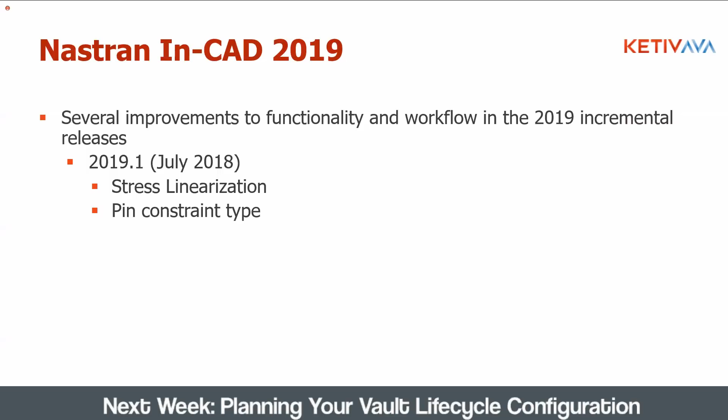So first of all, I want to talk about what was modified, what was changed in 2019. There were several improvements to the functionality and the workflow in the 2019 incremental releases as compared to the 2019 release. So if you didn't download some of the updates, for example the 2019.1 in July, you may not see some of the new features like stress linearization, for example, which you will now see in your results environment. There's also a new pin constraint type that was introduced in this release.

And there was also something called signed stresses for fatigue. So in a multi-axial fatigue study, you now have an option to either look at the stresses just as absolute values, or you can actually have the positive or negative sign attached to it - positive meaning tension and negative meaning compression. So it allows you to differentiate between the two types of stresses.

One of these, stress linearization, we actually covered in depth in September of 2018. We did an AVA on that specific topic. If you're not familiar with the concept of stress linearization, it's something that's pretty useful in designing pressure vessels, and it helps you specifically compare your FEA results with the pressure vessel code.

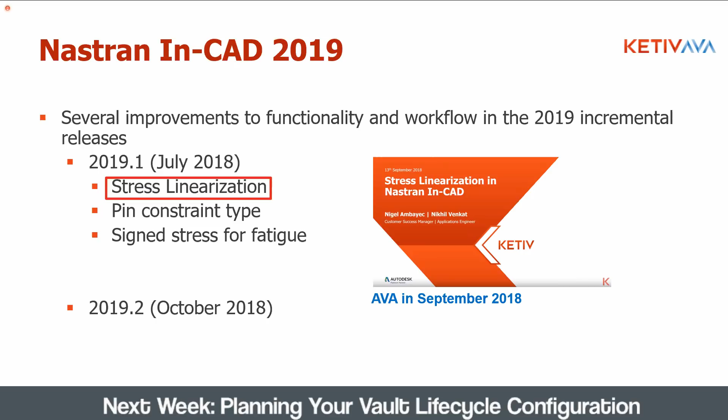There was another incremental release in October of 2018, and this was slightly less significant. So there were a couple of little additions in here. There was a new constraint type called the frictionless constraint type, and then there was a new contact type as well, which made it easier to model shrink fits and interference fits.

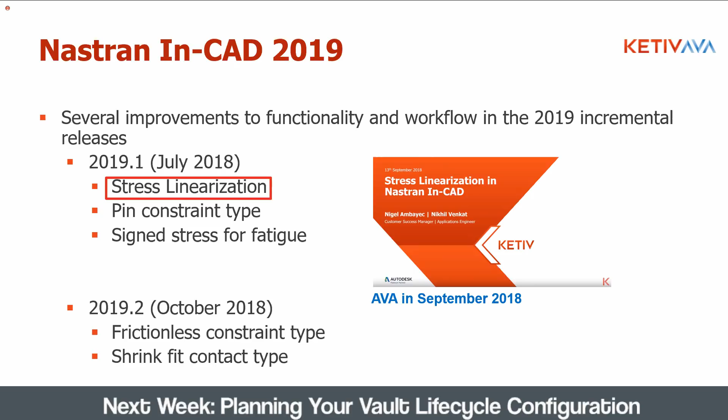Between 2019.2 and 2020, there have been several new features and improvements. Most notably, as Nigel already mentioned, this is now called Inventor Nastran, so you don't have to worry about the confusion between Nastran versus Nastran InCAD and all of that. Inventor Nastran, I think, captures more of what Nastran InCAD is about.

In addition to the usual improvements in meshing, improvements in solver, and improvements in general aesthetics, there's now improvements in how Inventor Nastran handles frame generator components. If you've tried using frame generator in Nastran InCAD 2019 and previous, you would have noticed a few bugs. For example, when you try and select a specific member of a frame, the solid portion of that would disappear and you would just see the line there. So they've fixed some of those bugs.

They've also fixed the bugs with the unit system. You may have noticed that there were different units being used in different areas. You may have set a unit system at the beginning of the analysis, but you still go into your loads and it still says Newton, or it still says kilograms, when you were really going for pound force or PSI. Those have been fixed as well.

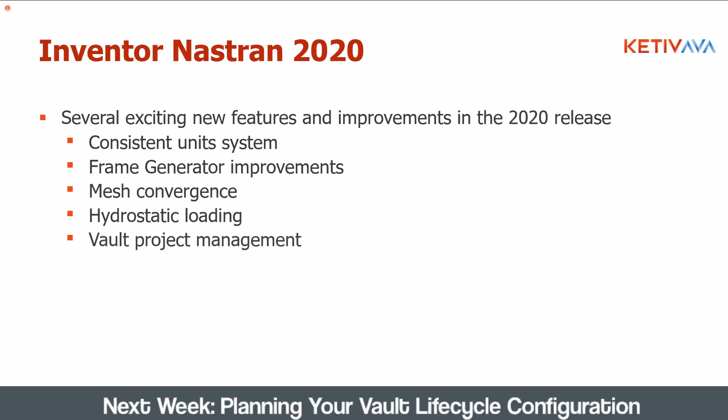But the biggest improvements, the biggest enhancements come with the addition of new features: automatic mesh convergence, hydrostatic loading, and the biggest and a really important one, I think, is Vault project management. Those are the ones that we will be covering today: mesh convergence, hydrostatic loading, and Vault project management.

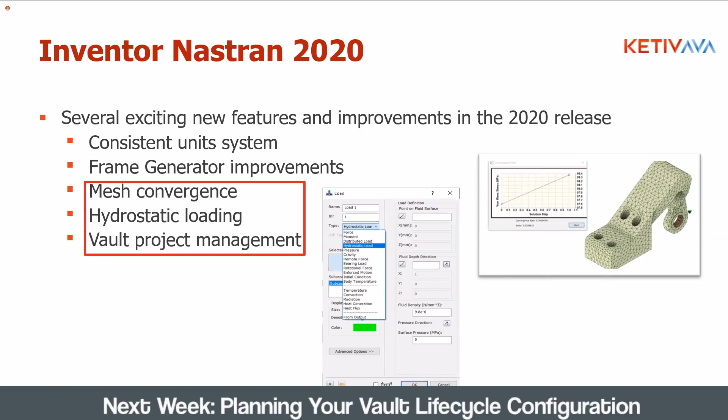The Vault project management, again, if you've been using this for some time, that's been a source of frustration for a lot of users, because at the end of the day, Nastran does generate a whole set of files associated with a certain analysis, and managing that manually can become really difficult, particularly considering the way the files were saved with names that were pretty much gibberish. So that's now a lot easier to manage, and you can now manage it using one single package file. We'll talk about all that in detail.

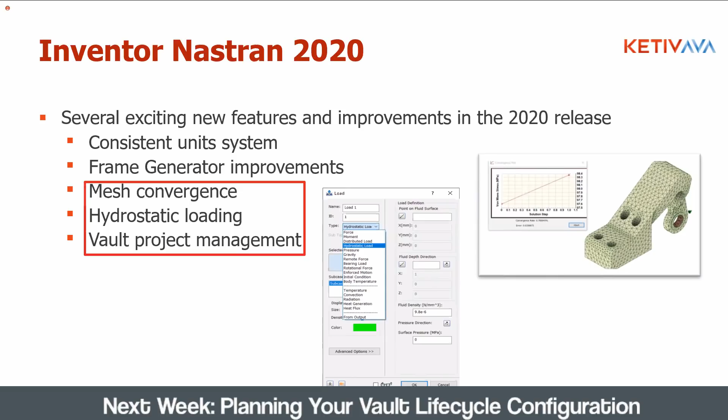Let's start with the first one on there, the mesh convergence. First of all, this is Inventor 2020, and if you haven't had a chance to take a look at it yet, you'll notice that it looks different. Aesthetically, it's different, it looks a little cleaner. The Nastran environment also changes because of the Inventor environment. Right in your environment now, it doesn't say Nastran InCAD anymore, it says Inventor Nastran.

Right here I have a pretty simple bracket. You can see it's got a few different components here. It's got two planks, it has a bushing, and it has this needle, which is going to be your load bearing component.

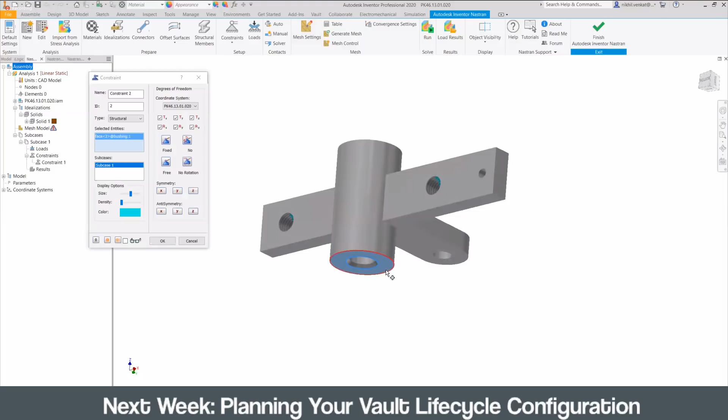To start with, I'm going to add some pretty simple constraints here. I'll fix the bolt holes on either side of this, on either plank, and I'll fully fix those. I'm also going to go ahead and fix the translation of the base, the bottom surface of this bushing. So this is going to be allowed to rotate, but it won't be allowed to translate. Next, I want to apply a load.

In this case, I'm going to apply a moment. So under loads, if you change the type of load to moment, then I'm going to select... actually, hang on, this is one of those things where I didn't change the unit system. I'm going to go back and modify it. So this is Newton millimeter, and I want that to be in pound force inches. I'll go back and edit my unit system to English.

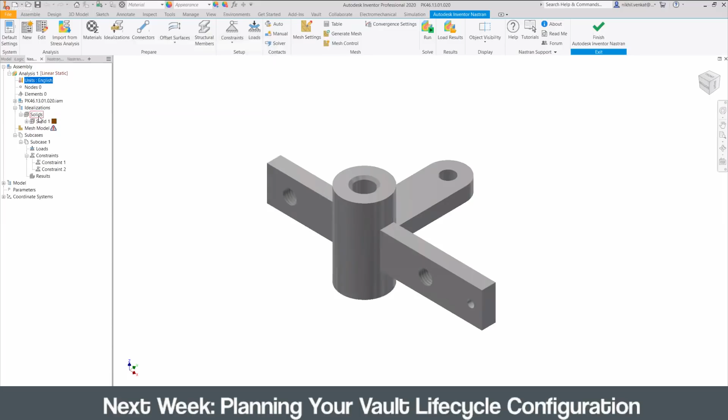If I go back and add a load, notice that automatically changes to pound force. Previously, this didn't, and this is one of the bugs that's been fixed.

I will apply this moment to the needle end here, the hole at the end of the needle, and that's going to be a moment of minus 200 about the z-axis. Go ahead, hit OK, and you see a little glyph there. It's associated, it's inside the surface, but that's essentially the direction of the load that's going to be acting on that surface.

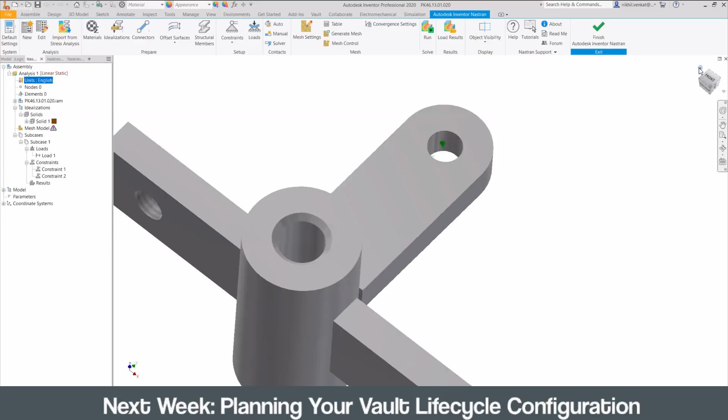I'm also going to go ahead and modify the mesh size here. So I'll use a mesh size of 0.16 inches. And I'll modify some of these parameters, at least the element growth rate, since there are a number of holes in this model. I want the growth rate of the elements to be reasonably small.

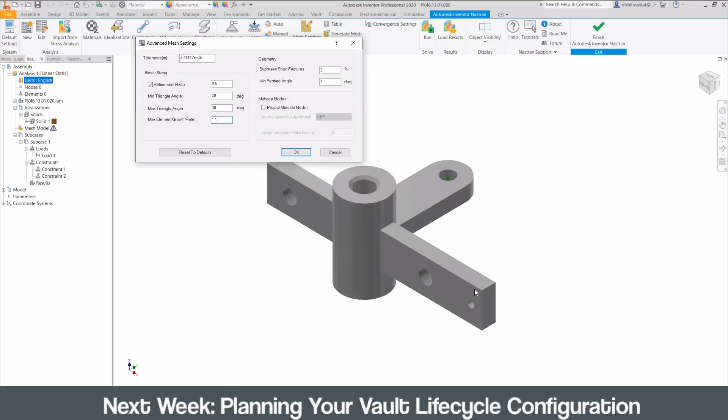Okay, so we'll go ahead and generate that mesh. And when I say element growth rate to be small, notice how the elements around the smaller hole there are actually smaller than the elements around the larger hole in the rest of the body. So that's what we mean by small growth rate. If the growth rate were larger, then you would see a more uniform distribution of elements between the two holes here.

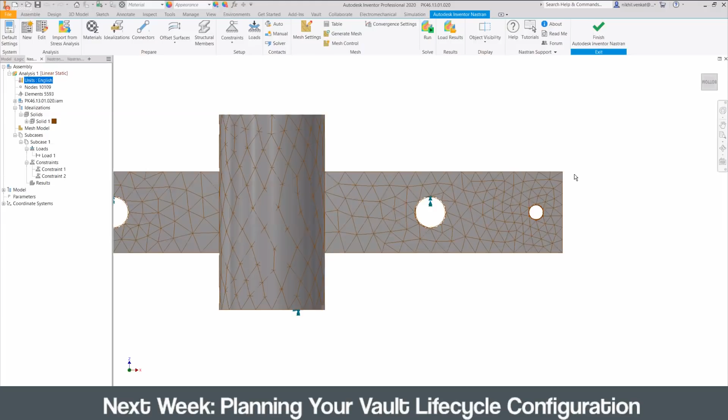Now the new feature is the mesh convergence portion of it. To back up, we've talked about mesh convergence in one of the previous AVAs from last year, I believe. The mesh convergence setting in general is a metric to determine how accurate your solution is with respect to your mesh. In general, the finer the mesh, the better, the more accurate the solution. But there comes a point when refining the mesh further doesn't change the solution significantly. At that point, your result is a mesh independent solution. And that's what we're going for, right?

Previously, we would have to manually go in, run the analysis, get some result. Now, to confirm that your solution is independent of your mesh, you would then have to go back, modify the mesh again, rerun the analysis, and keep checking that way. This was not an easy process. It was not a quick process. That's now a lot easier.

So I can go into this convergence settings and refine the mesh either locally or globally. In this case, I'll choose local refinement. I'm going to choose the number of refinements here, let that be 5. And I'll talk about what these different parameters mean. The refinement factor is how much you want to increment the element size by, right? How much smaller do you want to make the element? In this case, I'll say I'm going to refine this by a factor of 10%.

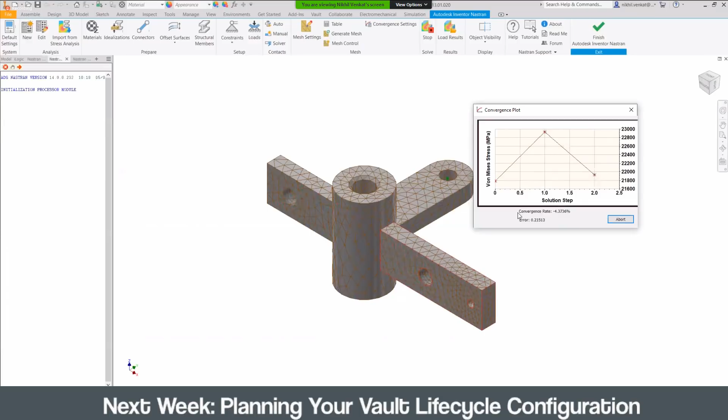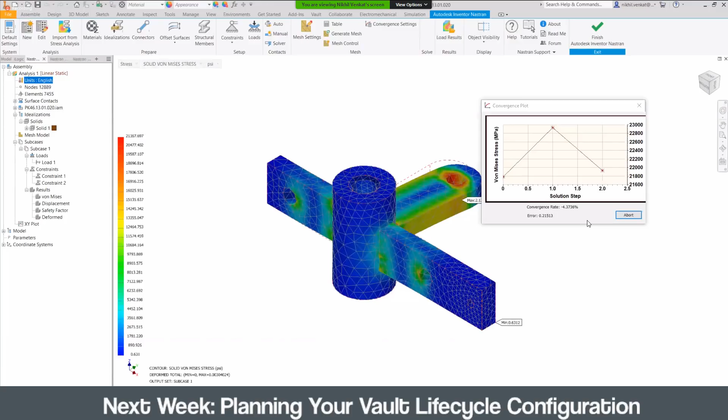It's a lot easier now to understand the accuracy of your solution, and this will tell you whether or not your mesh is the source of your inaccuracy. This convergence plot will go on until all the iterations are done. Okay, we'll give this a second. Okay, there we go. It says stop criteria has been met, or the number of refinements have been attained.

That finishes the refinement process. We're seeing that at solution step 1, after you refine it the first time, the stress actually increases at whatever the highest stress point was. But subsequently it keeps going down, and eventually the convergence rate goes below 3%. It's negative in this case because the stress is reducing, but the absolute value is still below 3%. This gives us an idea of how good our solution is with respect to the mesh, or rather how good our mesh is for this particular problem.

Now you can also do this globally. If you're not sure about the global mesh size, what we did here was local refinement. If you're not sure about the global mesh size itself, you can change this to global refinement and run the same problem.

Any questions here? I want to reiterate, go ahead and open those convergence settings real quick, Nikhil.

I know that 19-year-old me, 20-year-old me, engineering student me, would have made these numbers absolutely ridiculous—like number of refinements 50, stop criteria 0.5%. There is a point of diminishing returns, much like increasing mesh element number. You're going to get to a point where it's almost flat, and all you're doing is crushing your computer without actually getting a better answer, or an answer better by maybe 0.1%. So please use reasonable numbers in here. I know that me 10 years ago would have done some ridiculous stuff in here.

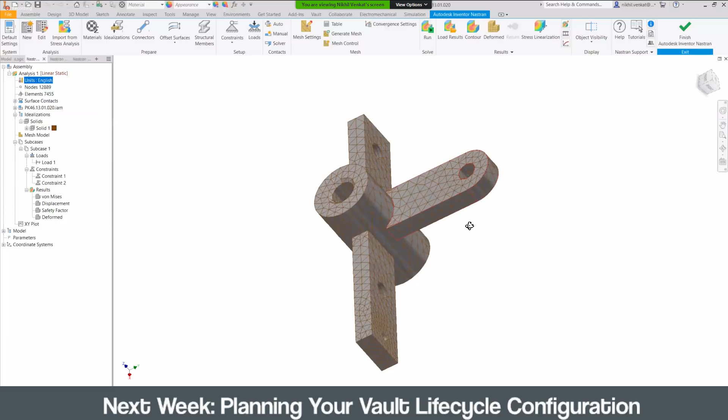So most of the refinement is going to happen either in this region where the constraints are, or in the areas of contact, because we do have some sharp corners and everything. So it's going to be in one of those two regions. That's the difference between local and global—it's got nothing to do with the total size of the element itself, but local refinement is going to deal with those areas of highest stress. And it's important to remember that it's highest stress, not highest displacement.

Cool, hopefully that answers that. Nikhil, can you go into the results of this and show where it actually shows the convergence stuff? Sure.

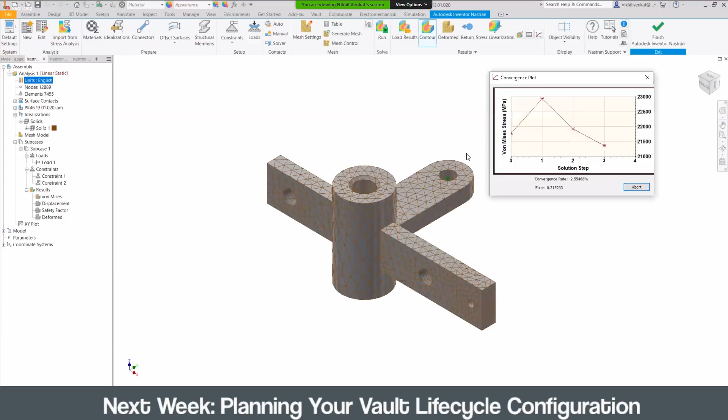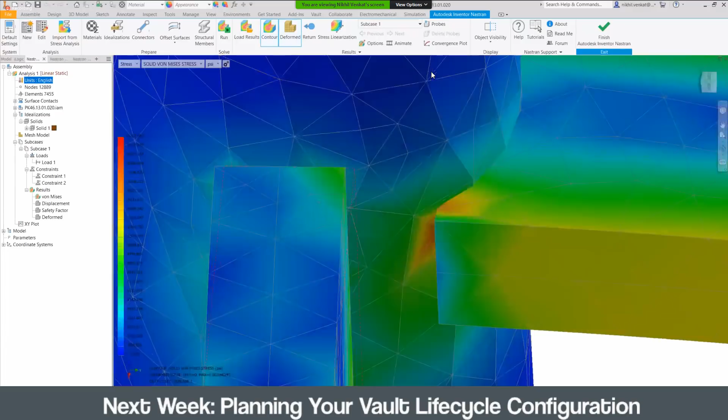So the convergence plot, if you go into the results here, you'll see that right here. And it's either refining these areas or it's refining those areas there.

That's where you would access the convergence plot. If you had a percentage where the absolute value was less, it would take longer for the mesh to converge. And if you had a larger number of iterations, it'll just keep going. So like I said before, don't make that number too big, at least on the first try, because we kind of have an idea that the mesh needs to be refined in these areas. Maybe after this trial, we can manually refine the mesh in those areas, or run it again with some more critical numbers in there.

Obviously not changing it too much. So I think we can keep moving.

Okay, now we have this, we have our results, we have our converged results. This is going to show up as a file, hang on, let me find this file here. It'll be whatever today's date is. Modified, yeah, it's going to be in here, I believe. Yeah, so there we go.

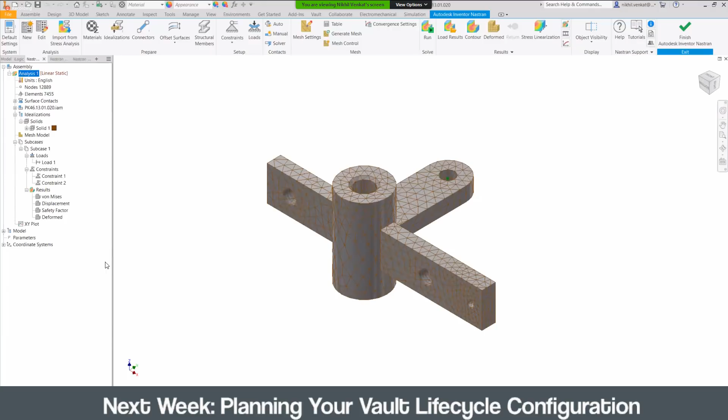It'll be one PKG file per assembly, but that one PKG file can contain as many things as you want. If you had 4 or 5 different analysis types here—linear static, normal modes, nonlinear, etc.—you can still create PKG files and associate them with the CAD model. The only thing this package file does is zip everything together. It just grabs everything that's in the FEA file, in the InCAD file, and in the InCAD folder, and zips it all together.

No matter what gets added on to this results folder, that can then be updated and added to the package file. Hopefully that answered that question.

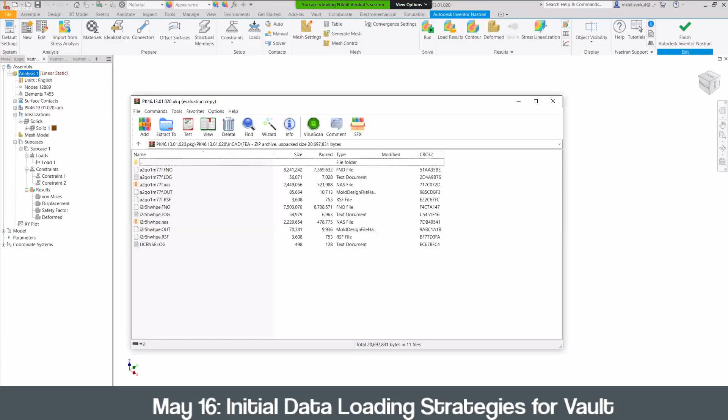To check this file in, you need to use the Vault client. You don't check it in from Inventor. Yes, you need to go into the Vault client and actually check it in, whether that's an initial check-in or a recheck-in. It'll look on your local working folder to find out where that is and do it. Let me show you how checking this file in looks like, if I can log in.

It's much more secure than mine—mine has no passwords. I believe I was showing somebody that they needed to use their password, and that's why I just created one. You're probably not using a Vault project file. Yeah, I'm not, okay, never mind, we can go do that later. Yeah, we can open this up later on. Let me just save this in the meantime. Okay, alright.

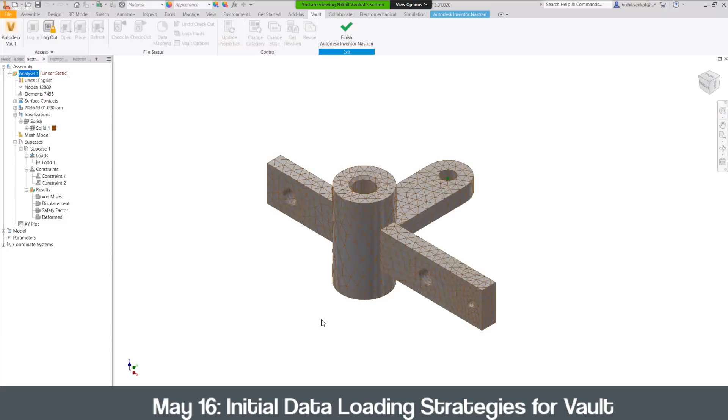So if you recall when I was talking about the new features, the third thing I talked about was hydrostatic loading. That's a pretty interesting feature as well. Hydrostatic loading, or a hydrostatic load, just means it's the load being applied by water because of gravity. It's as simple as that, right? Of course, there's the pressure being applied.

There's a big aspect to this, which is the height of the water. The water is going to contain potential energy because of its height, and due to that, the pressure is actually going to vary. Previously, you could still do this—some of you, if you've attended the Nastran In-CAD trainings, may have been familiar with a water tank example where you have a varying pressure with height. That's okay to do, there's nothing wrong with doing it that way, but it's a much more manual process and it's a lot easier to go wrong that way. Now you have a specific load type just for a hydrostatic load.

So I'll set this problem up with a very simple method. Let me just modify this material—I'll pick a steel tank. For constraints, I will fix the base, so nothing complicated here until we get to the loading part of it.

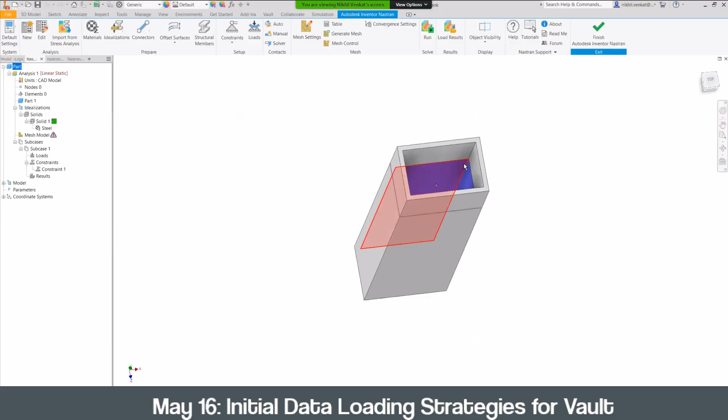Also, just by the way I've set this up, I have split this body into two, and everything in blue is supposed to represent the level of water. So on that surface, on the plane where the water ends, I have a point here, and that point is going to be representative of the surface of the water.

So assign a load, and this is the new load I was talking about. Previously, what you would have needed to do was apply a variable pressure load, using either a whole bunch of points, or an equation or something like that. Certainly not the easiest way to go about it.

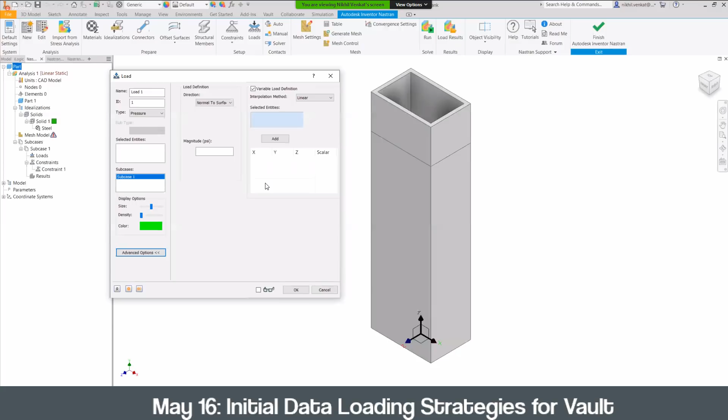Now you have this hydrostatic load, which contains information like your fluid density and your load definition and all that stuff.

So I'll select the entities to apply the load to, and that's going to be the blue surfaces here. So grab those. That should be 1, 2, 3, 4, 5 faces. There we go.

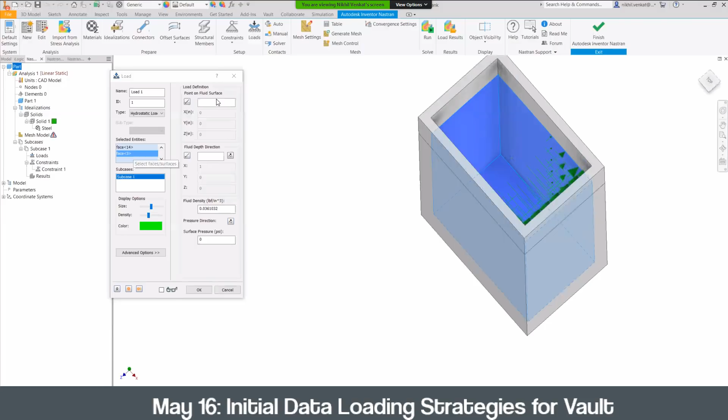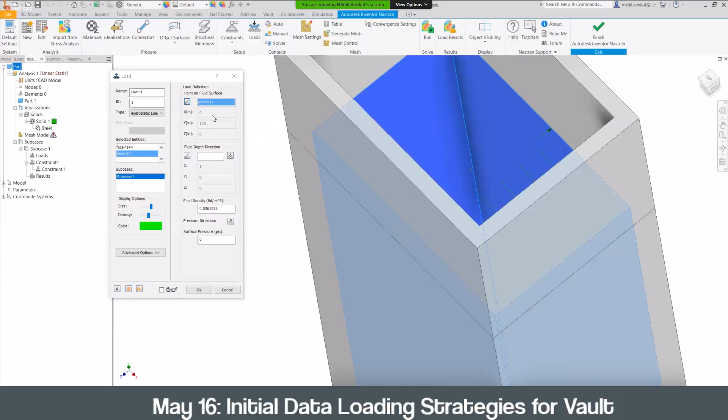Now the next thing we want to select is a point on the fluid surface, and that's why I've created that point there. That's on the fluid surface itself, and I'm going to pick that point, which represents the total height of the water column, or of the water. So it gives us the absolute coordinates of this. If you do want to modify that, you can just hit this button and change that manually, if you didn't want to place a point there as a CAD entity.

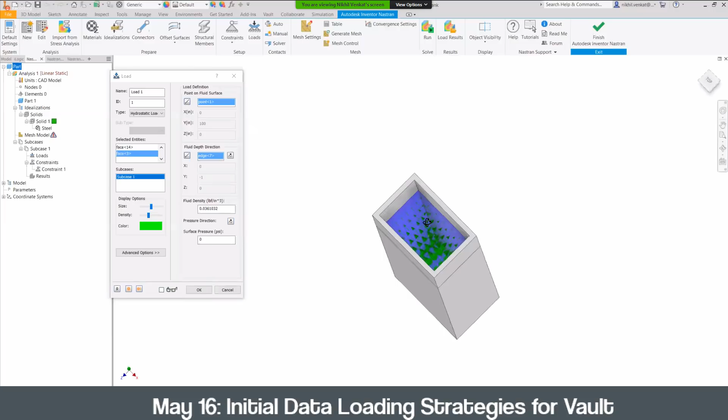You also need to select the fluid depth direction. Is it going upwards or is it going downwards? That's the fluid depth. You can always change the direction of this. At the moment it's going downwards, which is what we want. So it's negative y, as you can see here.

And then the actual surface pressure. Is there any pressure outside of the hydrostatic pressure itself on these surfaces? I'm going to say yes. It's going to be a 200-pound pressure load on those surfaces. And then you can preview the load, and there you go. That's our hydrostatic load right there.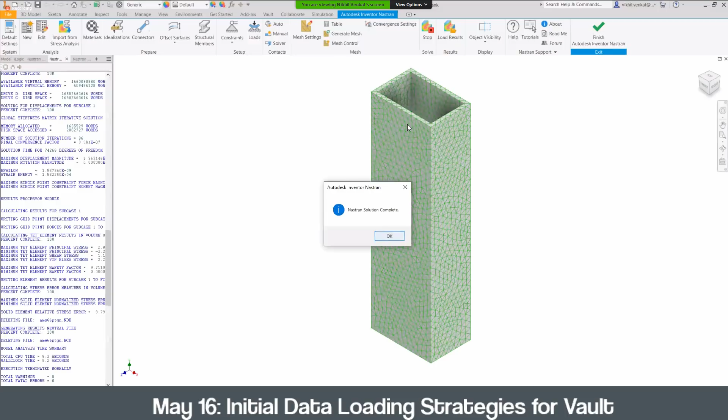Like I said previously, if you've seen one of the training examples or tutorial examples, you would have seen something similar where just the loading part of it is so difficult to handle.

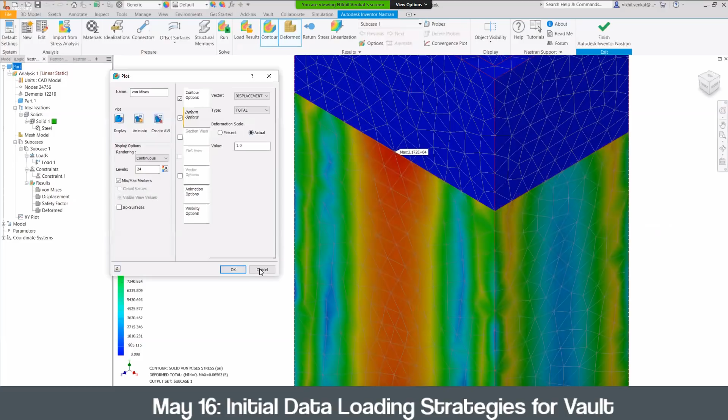Now, this might seem a bit odd, I completely understand that, but that's only because we are looking at a distorted version of the deformation. The actual displacement is 0.06. So it's just that the two bodies are split, and that's why you see that gap. You can add a surface contact there to prevent that from happening.

But yeah, this is a quick and easy way to look at what the pressure load looks like, or look at what the stresses look like. To kind of drive the point home,

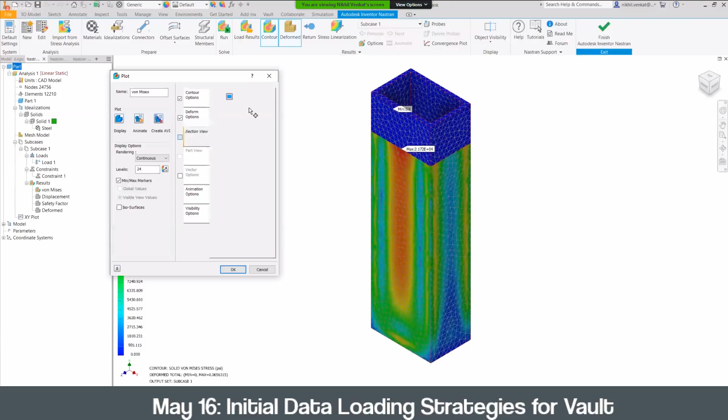I'm going to create a section view here. Create a section with the cut solid. And just make this a little nicer looking. There we go.

Right, so that's what we're likely to see. The pressure on the walls, rather, if you're talking about fluid flow itself, the pressure through the middle is going to be higher than the pressure at the walls, and that's exactly what we're seeing here. You see the stress is highest down the middle of this water column and lower towards the sides.

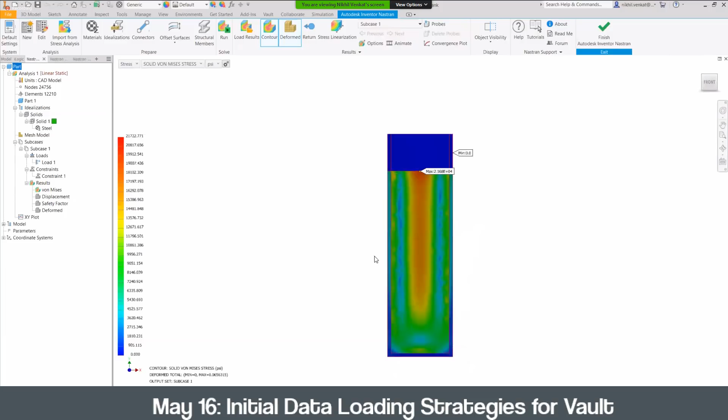And if you notice down here, even though we have a pressure load acting on the base, you see that the corners here almost have zero pressure.

So super simple, quick way. This is useful for any area where you're using a hydrostatic load. So if you're designing something that's going to be underwater, whether a simple water tank, a pressure vessel, whatever the case may be, it's a really quick and simple way to handle and manage these loads.

Any questions? There should be a few in there, Nikhil. Okay.

So, is the external pressure applied to the fluid on both the container and the fluid? There is no actual fluid here, I didn't model any fluid. All I did was change the appearance of those surfaces to blue, so it may have looked like there was fluid, but there wasn't. So to answer the question, the additional pressure was only applied to the surfaces.

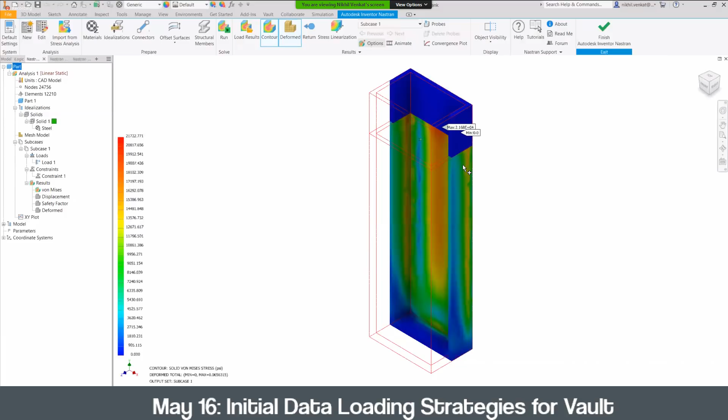So, can you show the deformation once again? So this is the deformation, this is the actual visible deformation. If you want to look at a distorted view, you can look at a percent deformation scale.

Right, so that's the only area that's being stressed, and that's why we see that kind of split there. Yeah, but if you did a contact, then you wouldn't have that, right? Or it would fix that. Yeah.

Can this be used to simulate the effects of vacuum? I'm not sure exactly what you're looking to simulate, so I think we can talk about that offline, Claudio.

Why is there a 200-pound pressure besides the liquid pressure? Well, that's just an external pressure that we're adding, right? So there is the water, there's a pressure of the water due to the height of the water itself, and then for whatever reason we're adding additional pressure in there, right? So that's just the test condition that we have. You can also leave that at zero and it'll be fine, and that'll be a pure liquid pressure problem. But yeah, this is just the test condition that we have. That's all.

Yeah, not necessary, just something we added. Yeah.

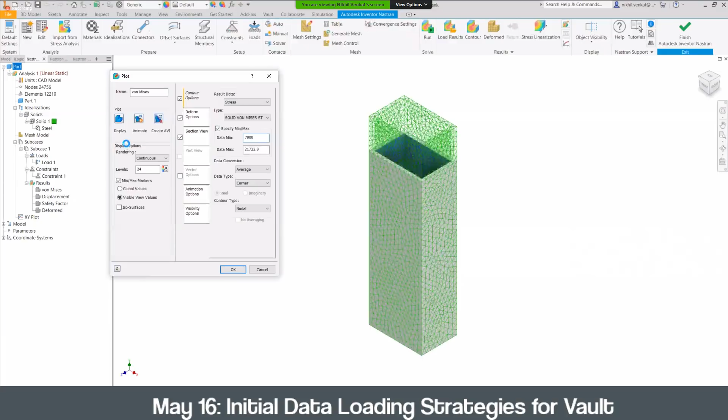So if you are interested in that, go ahead and click that link in the Zoom chat for that information. And then Mick Hall asked a question here: can you filter the plot to only show areas above 7,000 PSI? Absolutely, yep. All you have to do is go into the results and change the boundaries for that. So you can go into your contour options, change — sorry about the noise — you can specify minimum and maximum here, and say 7,000 to the maximum, right? So 21,000, whatever, yep, hit display there. And there we go. So everything but 7,000 and below is going to be blue, and you only see color sort of above that. And you can do that with contour options for stress, safety factor, et cetera, displacement, and so on and so forth. So yeah, super powerful.

Let's see what else. There's a question here that says, can we see a case where the box is hydrostatically loaded from the outside? You can certainly do that. Yeah, we just apply it to the faces on the other side. We won't go through that, but you can certainly apply the load to the outside of the box. Yeah, so think about something underwater, for example — that would be a case where you would apply it on the outside. But you would need a point at the surface of the water. Right, exactly, so that's the only difference. So you would need a point at a certain height above that object if it's going to be submerged.